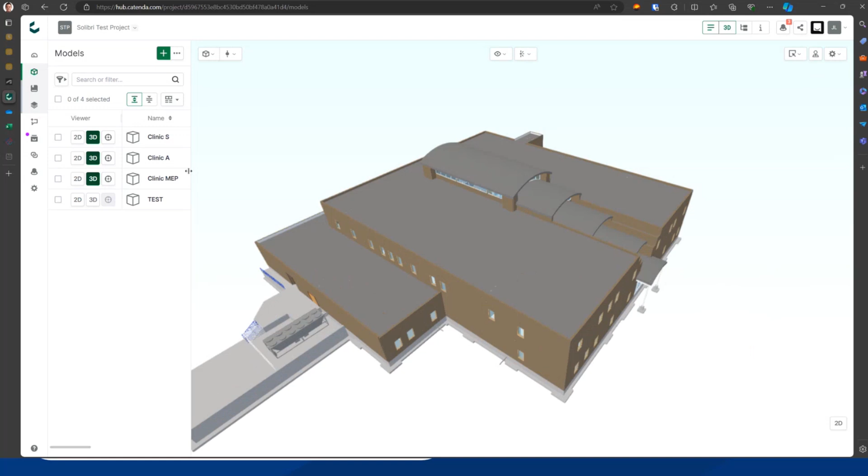But you get all the benefits of security. You have to have users that log in with passwords. They have whatever the security setup is, along with all the communications when something gets updated. You get emailed out and whatnot. I'm showing Catenda also to show the BCF Live connector, which I'll come to later in the demonstration.

But I'm going to actually house the model on ACC, so this might be familiar to you. And this is the basic structure of this project. I have IFCs, again, an open standard that we embrace. IFC is essentially you'll export your model from Revit or Vectorworks or ArchiCAD to an IFC file. It stands for Industry Foundation Classes, and it basically standardizes all the information and geometry into something that you can transfer, and you need to do this if you want to open it in some other vendor like ArchiCAD if you export out from Revit.

And then this SMC folder is where the project is I'm going to load. So I'll go ahead and do that. So you click Open Models, and then at the top here you can see I already have these connections to OneDrive, Catenda. I'm going to open it right from BIM 360, and if you recall the structure of that project, I have my project files, IFC, SMC, and this is where this model lives. It's nice. It gives you the version control. This is the first version of the model I saved. I'll click Open. And this is going to load the model.

And the background on this: again, this is a model that comes from buildingSMART. It's a multidisciplined medical office building of a clinic. It's the architectural, the MEP and the structural. And as these load, you'll see they'll pop up. And this is downloading it straight off the web from ACC. That's where you can see these versions here again.

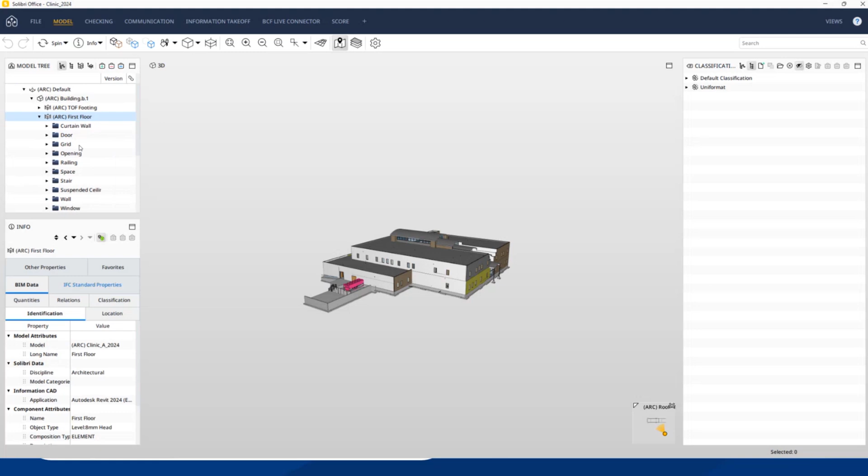And the nice thing about IFC is that it'll always have the same structure. As I expand these out, you can see it has the project, it has the site, and then it has the building. And underneath that building, you'll see floors. So I could turn on my first floor. I could turn on my doors. And then you can see all the doors on the first floor. And Solibri has a nice footprint control, so you can see where you are in the building.

And all of these components have their own properties. So I click on a door, you'll see that information from Revit. This is a Revit model, where you'll see the identity data property group. You'll see actual dimensions that come from Revit, along with some of the actual standardized properties that come over from IFC standards, which would be the Pset_DoorCommon. That's what they call this property set. So you can have the fire ratings and whatnot.

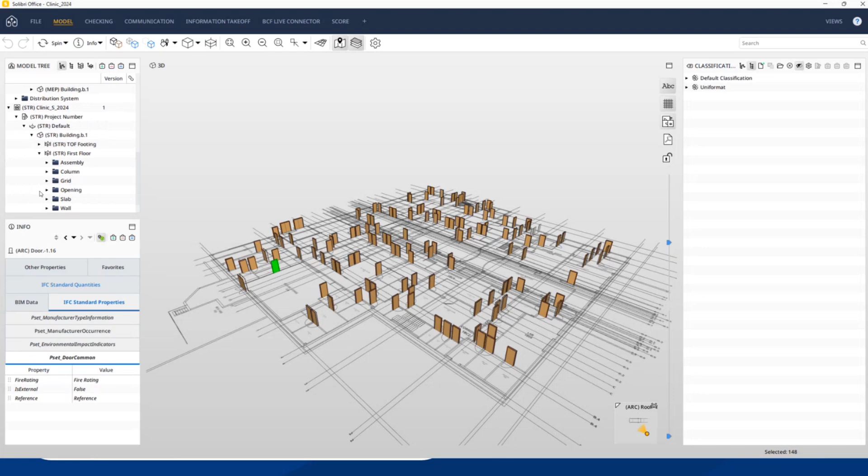And again, this is a benefit of IFC, is that it standardizes these so that you can open this in ArchiCAD and get the same information that you would have in Revit. And again, this is a multidiscipline model. So if I go into my first floor, I can turn on my columns and see where those are. And a nice thing is that it actually groups your systems as well. So I could turn on, for instance, my pipes and my pipe fittings here.

So here's the gist of it. You can navigate around, and the model layout essentially is where you'd query, do interrogation of your model, walkthroughs, and you can get a look and feel of where things are. Another nice thing, if I turn on walls, is that besides those dimensions and quantities that come from Revit, Solibri actually creates their own quantities based off of the geometry within the model. So I could use this information to see what the triangles, the mesh of this wall, would calculate as the area. It also calculates areas of openings or areas of windows.

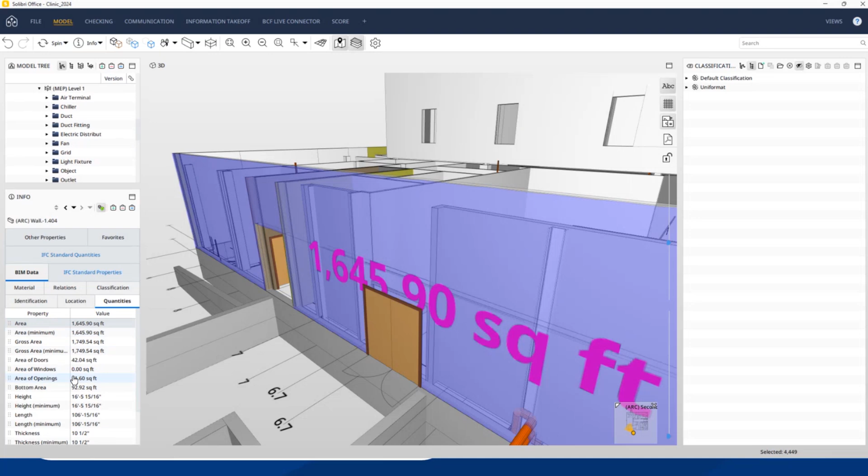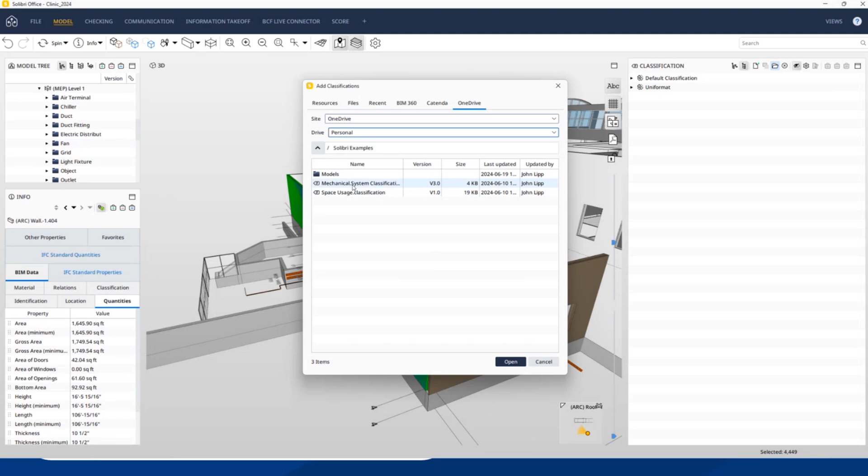And again, I'm using an integration into OneDrive. This is on my personal OneDrive of Solibri, but I could open it from a shared OneDrive. And if you have security concerns and you can't have these housed on one of these CDEs or anywhere on the cloud, Solibri is a desktop application, and all of these could be housed locally. Okay, so I'm going to load these two classification files. And as these load, you can see there's two different ones. There's actually some classifications that are brought along from the IFC. This is the Uniformat classification. And that's classification.

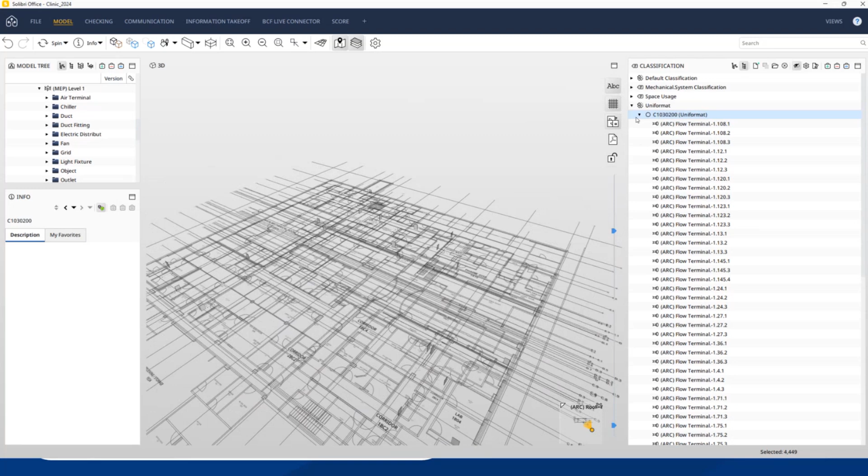You can see these look to be doors, I think. No, these are flow terminals, but they're coming from a bathroom. So they're classified based off of their Uniformat. Let's see if I got any other ones. All right, here's some light fixtures. I could click on a light fixture.

And what's nice is these actually get mapped straight from Revit from the assembly code that you might be familiar with under identity data. So that's where it's mapping these. And you can set these up if you want to go to that length. If you embrace IFC, you can actually use the IFC export setups and create your mappings and, I guess that would be called property manager, with your shared parameters to create these classifications yourself. But if you don't do that, Solibri has its own classification mechanism.

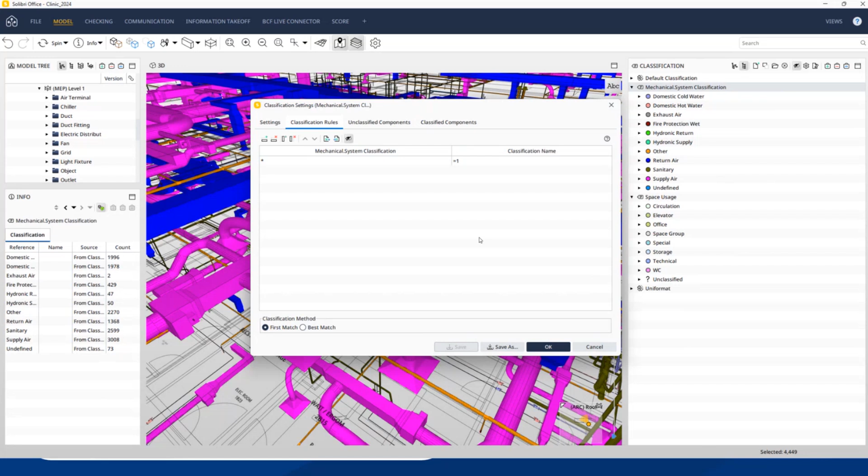So for instance, if I look at this mechanical systems classification and I open its settings, what it's doing is it's taking this property group from your mechanical systems, your ducts, your pipes, or what have you. And it's using the system classification property, and it's just using this =1 to grab that property value to classify those components. And then in settings, whatever that value is, you can color map to whatever you want. I've kept it kind of the same as Revit. I know the supply and return are pink and blue.

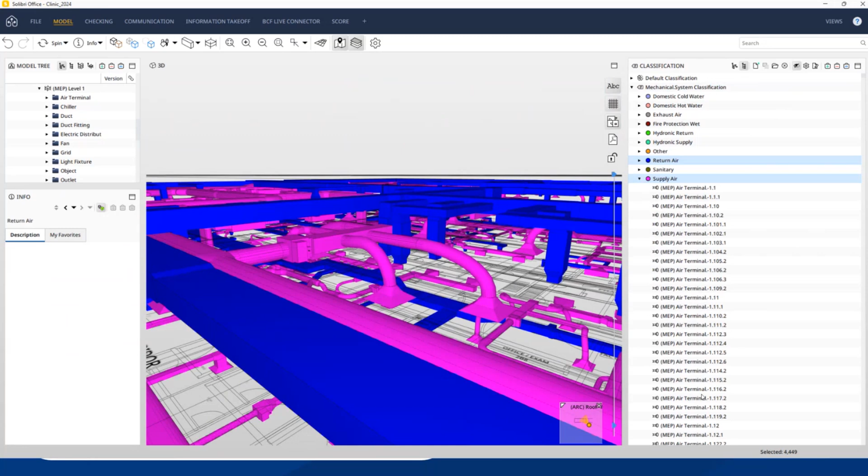So what you can do is then click on one of these classifications, and it then isolates those in the model so you can see where are my return air ducts and my supply air ducts. And you can expand them out and see those individual air terminals and ducts and whatnot. And so classification, again, makes things consistent.

If you want to use mapping, say the values don't map to a specific classification you need, namely function of space, you can actually use the classification rules of the values to then map to a specific classification. So for instance, my corridors would map to a circulation space, right? Or CORR. would be a circulation space, same as a hallway.

And you can color code. So say, for instance, my office is here, kind of this drab green, doesn't really stand out. I could change this to be whatever I want, make it a nice red color. And now my offices are this color, and I can see where they are in my project. These would be rooms, but we call them spaces in IFC.

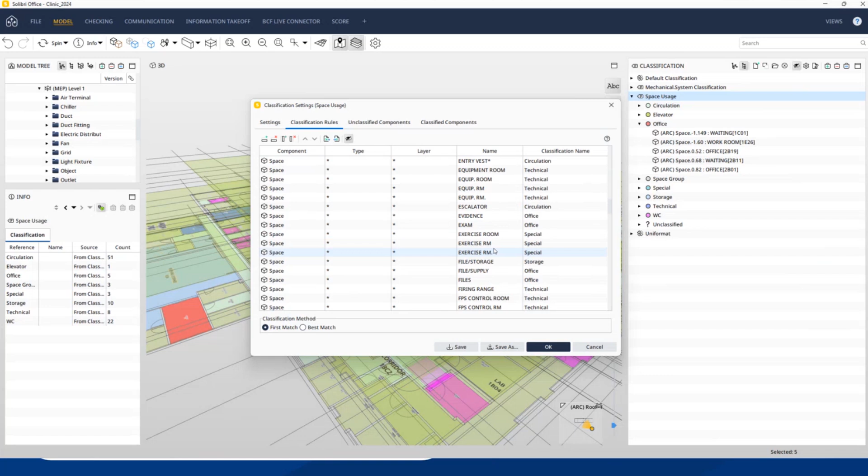But are those the 5 offices? What you can do is use some of these wildcard characters. You could adhere to a very strict naming policy, and you can actually check, which I'll show you with one of our rules, that those are an agreed naming list. But you can also use these wildcard asterisks. This means that any character or no characters can come before office or after office, and that classifies it as an office. So you can see I have 5 of them here now.

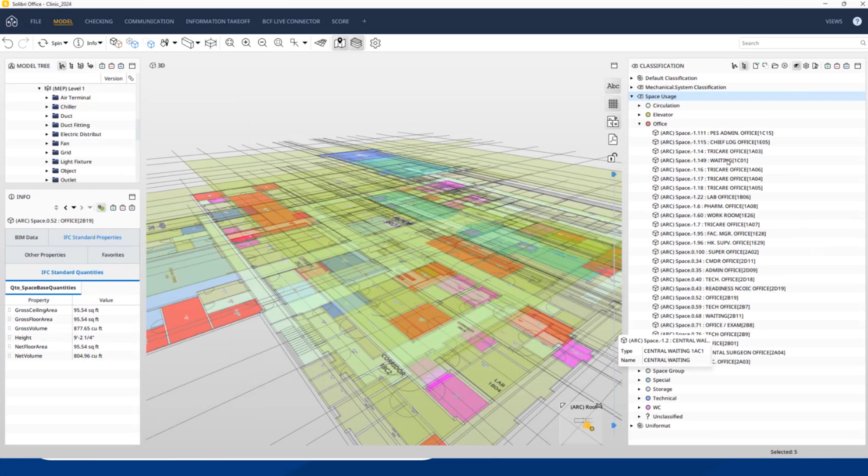After I click OK, boom, I get all these other office data. So now I'll have a more complete look at what my offices are. And you need to do this if you want to create a space program. Across your entire building lifecycle, early on, you can create and check your space programs in your schematic design and design development phases, right? And that's classification in a nutshell. I'll keep moving on to the next topic here.

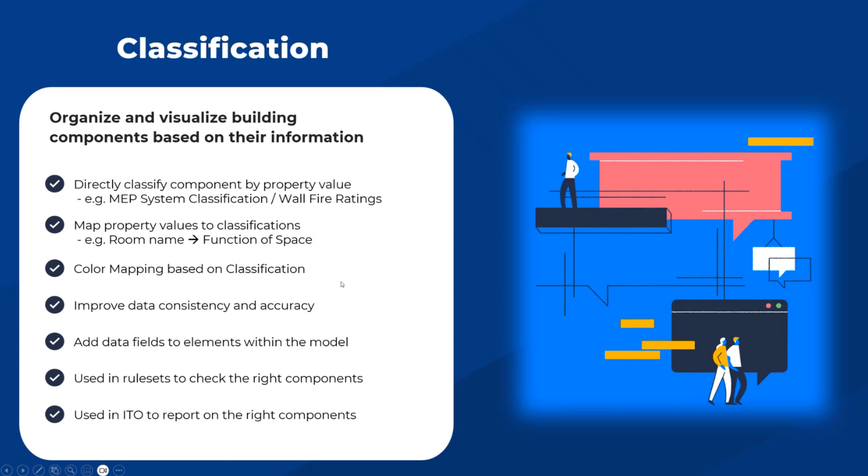Which then brings us to rules-based checking. You've classified your components, now you want to check them. And you want to check early. The earlier you find your issues, the cheaper they are to fix. If you can catch them in the design phase before things are being built, it's cheaper than in the construction phase when you're running your coordination checks and clashing, where you have to deal with the cost of rework and materials. All the way to checking against requirements such as ADA, where if those problems made it into the building, you could deal with actual lawsuits, because those are government mandated requirements, like your 18 inches past the latch and wheelchair turning circles.

And on top of that, you can align with other disciplines, the basics of clashing and coordination, along with different requirements, be that COBie, Construction Operations Building Information Exchange, or whatever requirements you'd have, either in-house through your company or mandated ones through government agencies. And I'm going to show you 5 different example rules, and these are the ones that our users use the most, or that showcase some of the valuable tools you can use in Solibri.

And that would be the clash detection matrix, which is a new rule that came out in the latest version 24.5 of Solibri. Next, I'll show you free area in front. The beauty of this rule is that you won't have to model your clearances in front of, say, your doors or electrical panels—those boxes you might model with geometry to then run a clash on. Instead, Solibri has a rule where it'll actually define that for you.

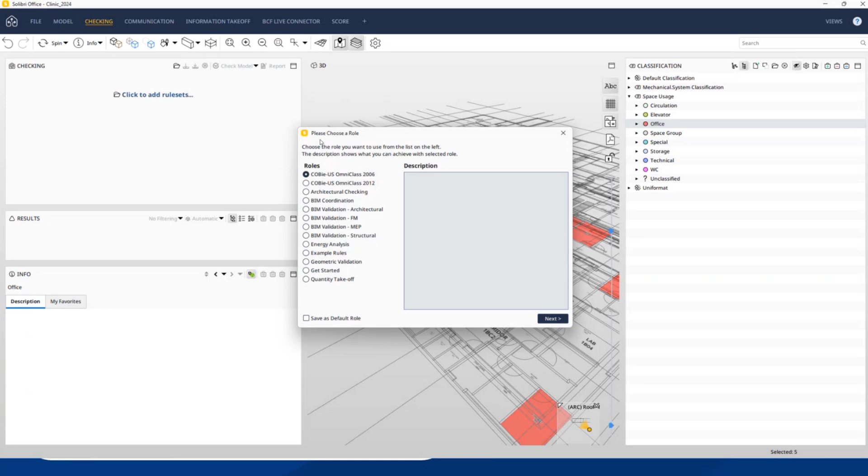And what you might have noticed is it opens this little wizard-like dialogue that asks you to select a role. And what a role is essentially, is what is your job? What is your use case? How can Solibri help you achieve that goal?

Be it whether it's BIM validation, where you're going to check QA, QC rule sets—basically validating the information there, do you have some weird types of columns not supporting things? Or are you running coordination, where you're doing clash checking between your different disciplines? Or maybe you're doing energy analysis and need to make sure you're pre-checking that all the properties are there for your energy analysis or carbon data or what have you.

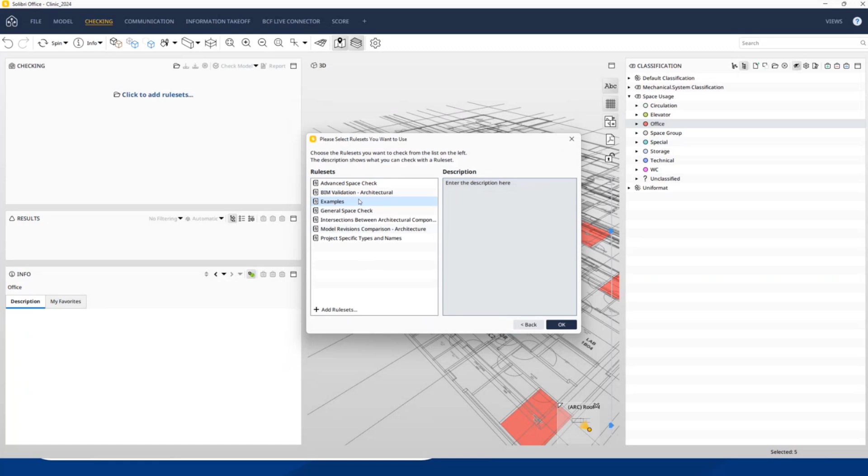As those load here, you can see this is what a normal rule set has—this nice little kind of hierarchical structure where I have my clearance checks under BIM validation. So if I expand these out, you can see basically how a rule is set up. This is the clearance in front of windows, right?

You select what the component is you want to check, and you can change this if you don't want to check windows. If you want to check for doors, you can see as I switch between these, there are two different filters—this is checking for windows with one set of depth requirements, as opposed to checking for doors with another set. If I click something else, clearance in front of ceilings, it's a whole new rule template.

And these templates you can kind of think of as recipes that you have to fill in the ingredients, which would be the parameters of what you're wanting to check, right? And I'm just going to show you these three.

What I'm going to do is open up my rule sets for editing. These are my example rules—you can see there's three of them here. I'll open it up for editing, and I'm going to drop in that new clash detection rule, and set it to my first example here.

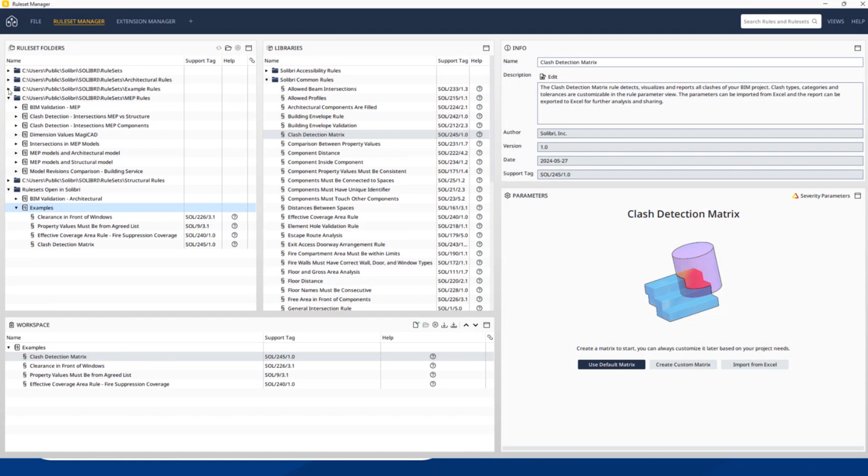And these are where the libraries are—they come out of the box with different rules set up for disciplines. You can check your MEP, basically like a check for maybe your exhaust intake being too close to your intake for your supply air. We also have each individual rule template coming with an example rule that shows you how you can set it up to run a certain type of check for you.

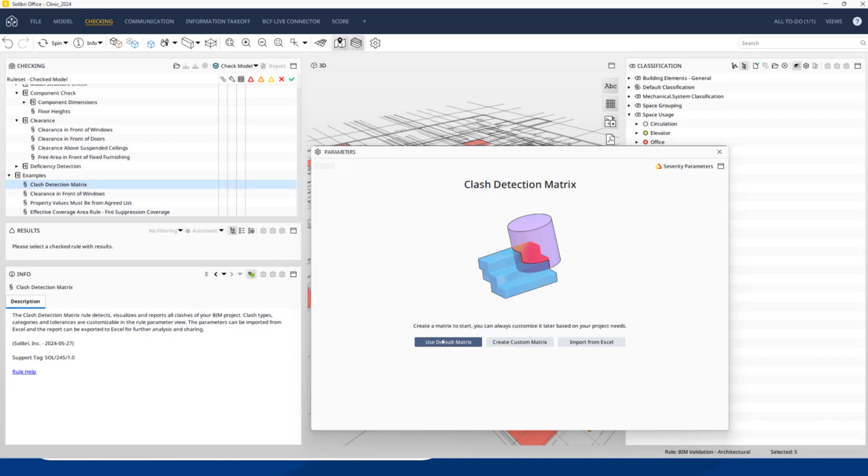What I'll do is jump back into Solibri and run this check on these examples. You can actually modify this rule on the fly that I just added to my list. I'm going to modify the parameters of the rule, and again, you can use the default settings or I can create a custom matrix.

If you're not familiar with what a clash matrix is, you basically set up your rows and columns, and where those rows and columns meet is where a clash category would exist. If you're not familiar with IFC, like IFC spaces, instead you want to use rooms or structural framing instead of IFC beams, you can change these.

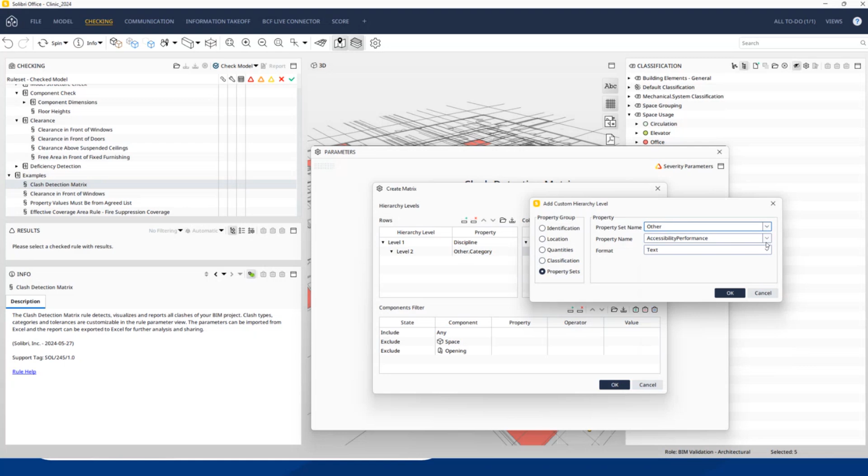What I'm going to do is load a different category here. These live on my OneDrive, and I'll open up my discipline categories. These are the locations, and you can click any location - I can show you how I set it. You just go to your property sets, which live under my property group 'Other' in Revit, under category. This is where you'll find those familiar categories.

Once I click OK, it's going to set up this matrix for me based off of what is in my model. If you have an early model and you're going to add more items that aren't present there, that's where you'd probably want to import an Excel sheet. But for the sake of how easy it is to set these up, this is the way to go for a demonstration.

Here, each cell you can see - if I wanted to focus on, say, ducts versus pipe fittings, and say those are a higher severity or more important to me, I can change the tolerances and change whether or not I want to check different types.

Maybe I want to check for duplicate mechanical equipment, or duplicate doors or light fixtures would be a good one. You can change the different types of clashes, and I can change the different severities.

So I'm going to say my pipes versus ducts are important to me. I'll say maybe my clashes that are internal to my structural model aren't so important, so I'll click multi-select and click low. Now I'll just run a check.

As it runs, you can see these progress bars go by. What's nice is I can actually start clicking and looking at issues. Normally the workflow would be you click an issue and you can see these different categories of different problems here, and each rule will have a different way of categorizing.

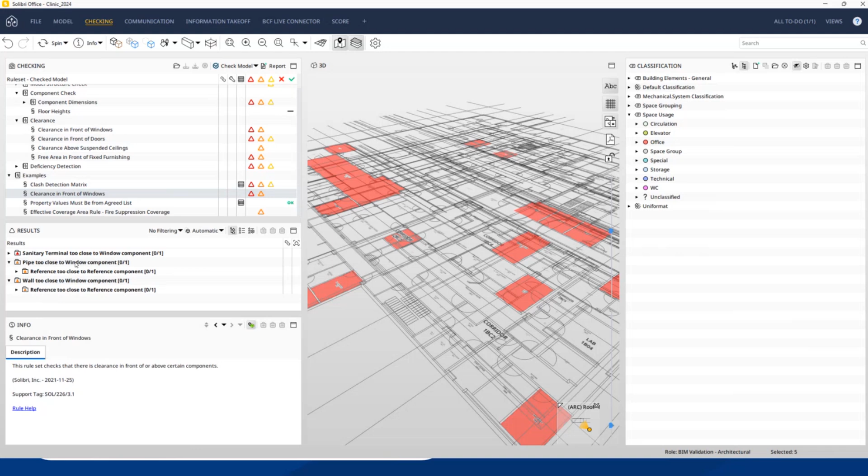I've jumped to this window just because Clash was still running. It's now done, and it'll basically show you the difference between these categories. Now it's showing me my pipes too close to window - you dig down and it'll tell me the type of pipe, and then it'll actually show me the issue with my pipe. This is the one I'm going to come back to later.

Let's jump right back to the matrix, and you'll see how it's organized these. It's done a great job of sorting by what's important to me - again, I said pipe fittings versus ducts is what's most important and critical.

What you can do is turn on and off these severities from the checking and focus on just your severe issues. As you turn these on and off, the rules that don't have those issues disappear, along with the actual listings of results. So if I turn off my high severity issues, which I accidentally did, and turn off my medium, you'll see it'll just drop out to only those high severity issues.

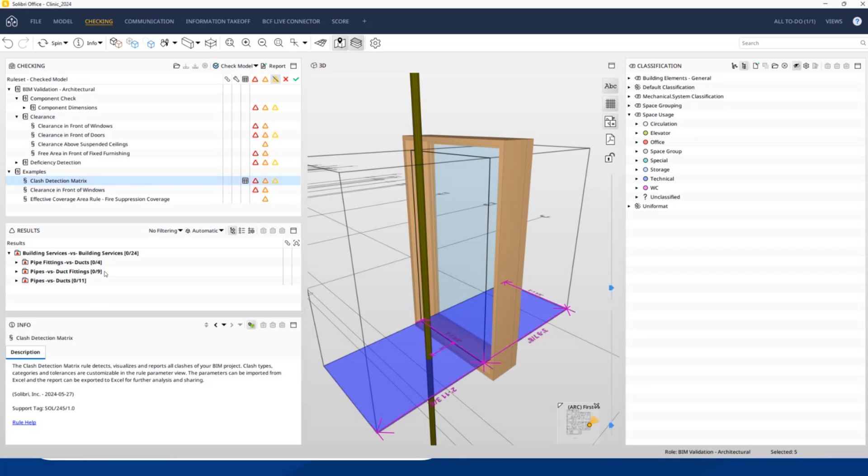I'll turn everything back on here. You can either work from here, but there's a beautiful tool that comes with this clash detection matrix - it's a report, and you'll see it has the same setup as in the parameters, but it's actually listing the counts of all these different clashes.

So I have ducts versus pipes, 11 clashes of ducts versus pipe. What I can do is click on this and double click on it, and it'll zoom me out to the location of where all these different clashes are. So here I can see it actually corresponds to these.

What I can do is right click on this cell, say select results, and then it jumps into my results view and takes me to that location of this category of ducts versus pipe.

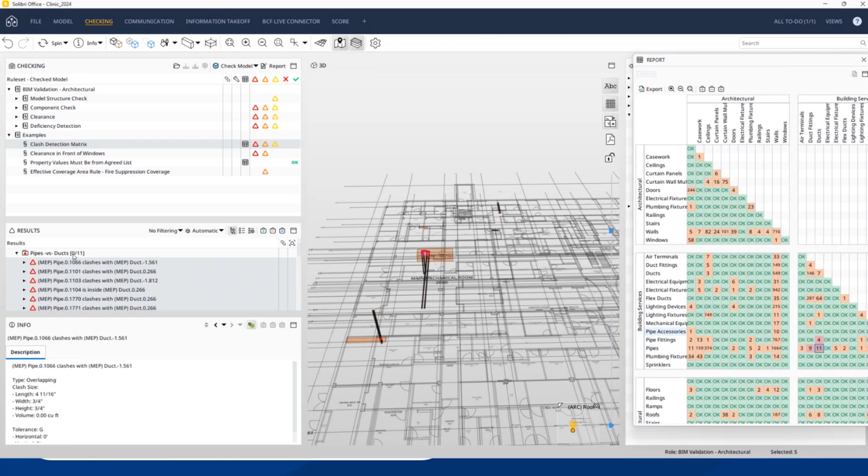And you see these numbers correspond. I got 11 ducts, but do I really have 11 clashes? If you look at this, it says there's 2 clashes here, but really these pipes probably correspond to one another, and you probably just need to move them somewhere, and it's probably just one clash.

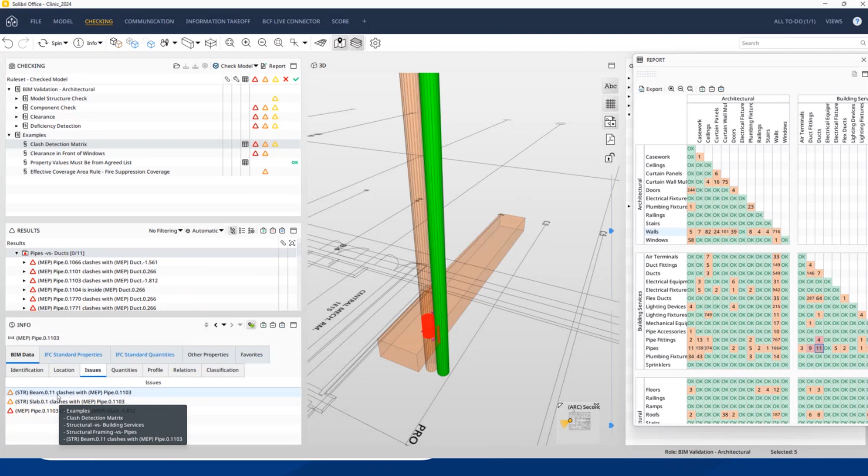But is it one clash? You can either work from this window here, or you can start looking at the individual issues by selecting on a component such as this pipe. And what you can see is if I go back into this pipe and click issues, it says I have 3 clashes here, right? I also have a clash with a beam, and I can double click on this.

It shows me, okay, I've got a clash with a beam. It's not only I have to move this pipe out from the duct, I actually have to move it from the beam as well. If I double click on it, again, it'll take me to that clash in the results view. So there's a whole different workflow, ways you can actually get a basis of what's going on in your model.

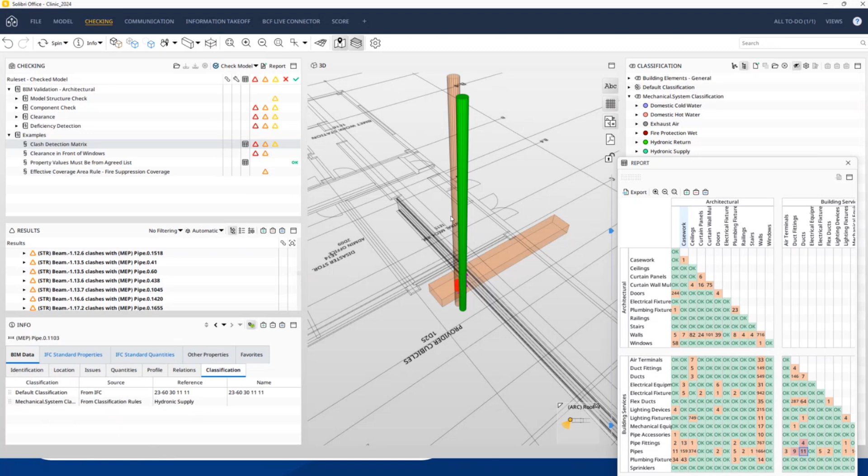Again, I can actually use my system classification. Look at what the system is here. It's a hydronic supply and a hydronic return. I probably would want to turn on those 2 systems and then look at the issues again. Double click on it, turn on the issues, and now I get a better feel for where are these systems headed.

Actually, that's over here where the clash was. It also gives you a great visual, making it transparent. The components that are clashing are highlighted as red, is where the actual clash is. It also gives me this little dimension line, and sometimes this comes in handy. Like for instance, I could move this pipe out specifically 5 inches and it would no longer clash. But you want to get a feel for what's going on.

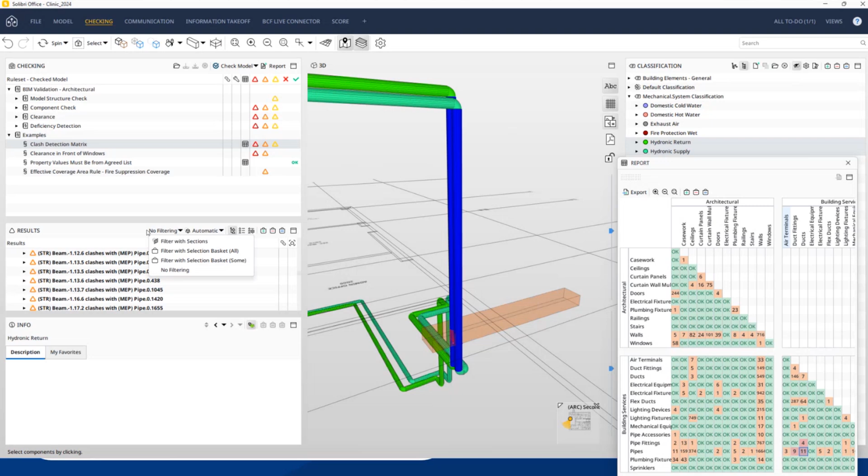And again, I could actually even multi-select on these and then use these selections to then filter all my results by them, right? And now only the clashes that these pipes have are now listed in my results. And what I can do now is focus on the basics of clashing and coordination, these and this duct and this beam that's running across.

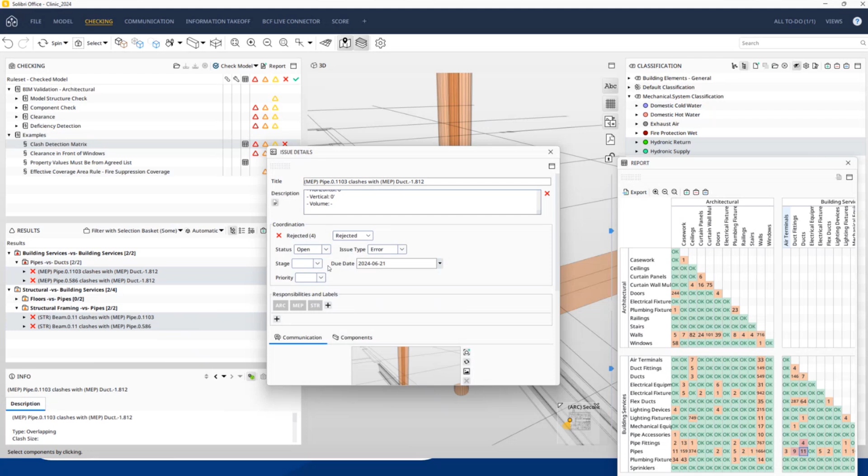And from here, I'm going to create an issue. I'm going to create an issue slide. I'm not going to go in too much depth because I'm going to cover that task when I'm going through the BCF or communication. But this is where you'll essentially set, for instance, a date. Maybe I want to have it done by the end of the week, and set whatever information you want.

I'll just say move. I've got caps lock on. Move the pipe out from the duct and framing. And I can actually add multiple slides, right? I could turn back on my hydronic supply, and I could turn on my beams, and I could zoom in a little bit more.

And now that I have this set, I want to set this to no visualization and say I want to add a slide here. And the beauty is now I can actually jump between these two visuals, and it'll come in handy when I'm using my CDE to show these issues. So again, you can get multiple viewpoints and multiple slides. And I'll just move on to the other checks. So that kind of sums up what you have for the clash matrix.

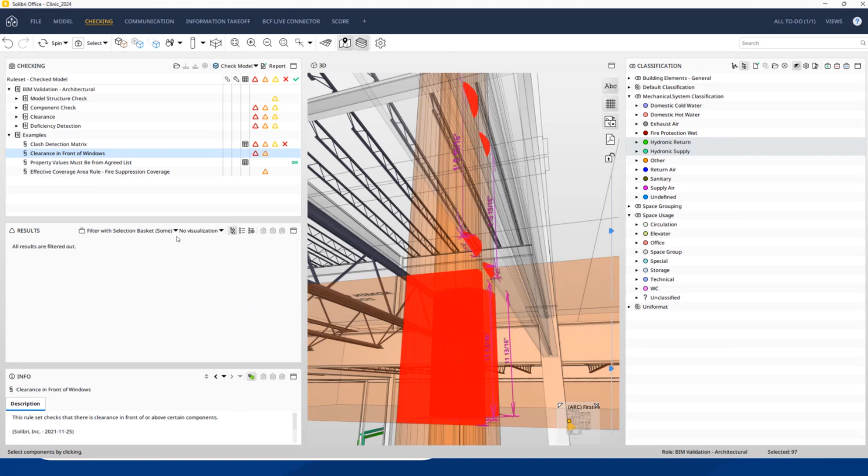Clearance checks. If it says all results are filtered out, that probably just means I have my filtering on. I want to set my visualizations back. So again, I'll come back to this soft check.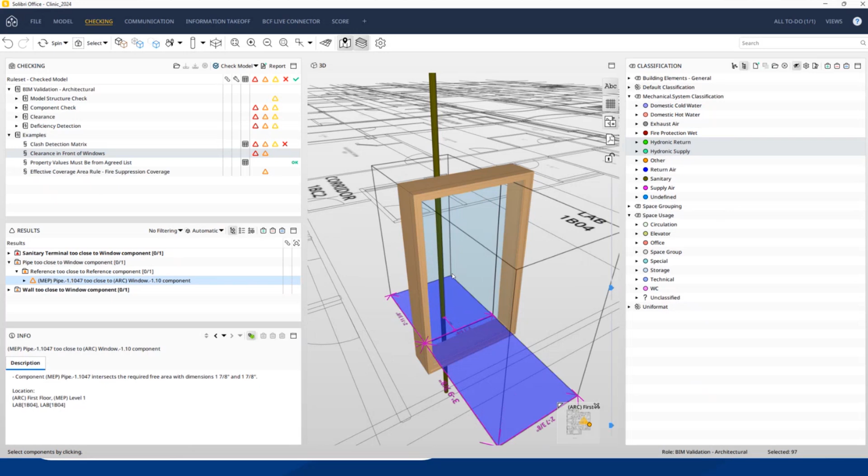And normally, if you're not using this tool, you'd probably model a clearance geometry in front of this and just run a normal clash. But what this is doing, again, it's finding and has a different visualization and gives you more information about what's the free area that you set up. It has to be 1 and 7/8 in front, and you have a pipe running into it. It's actually on this side.

So again, I'll create a slide for this. I'll just say move the pipe in the wall. And it also gives you the location, right? It says my first floor, and it tells you it's my lab. And if I look here, sure enough, it's in my lab 1804 on my first floor. So it gives you some information of where that issue's occurring.

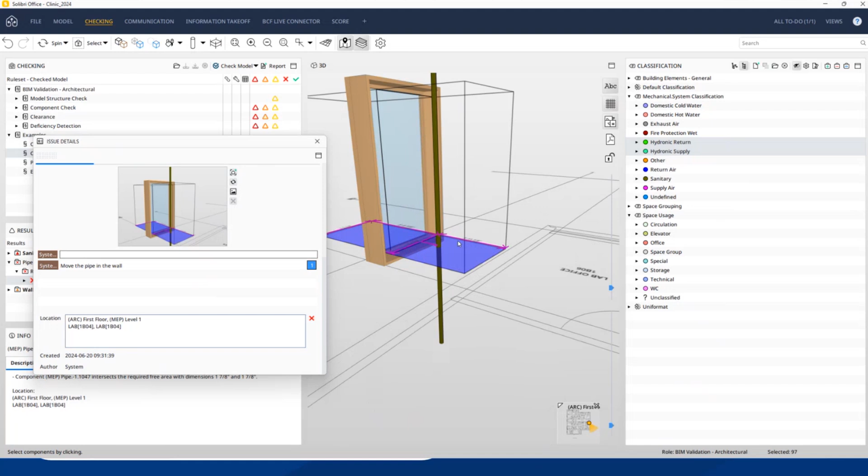And again, if I wanted to, I can turn everything on. And this will probably be useful for when I'm looking at it in another application. And I can set some, what I'll do is I'll set some markups. And we have markup tools. You can do a cloud.

I guess maybe I could draw it right here. And it superimposes whatever you're drawing on whatever the surface is, which is very handy instead of just having it float in space. And I'll just say it has to move up and kind of follow this location here. And then I'll just add another slide, right? Here we go. So now again, I can zoom between these two different slides there.

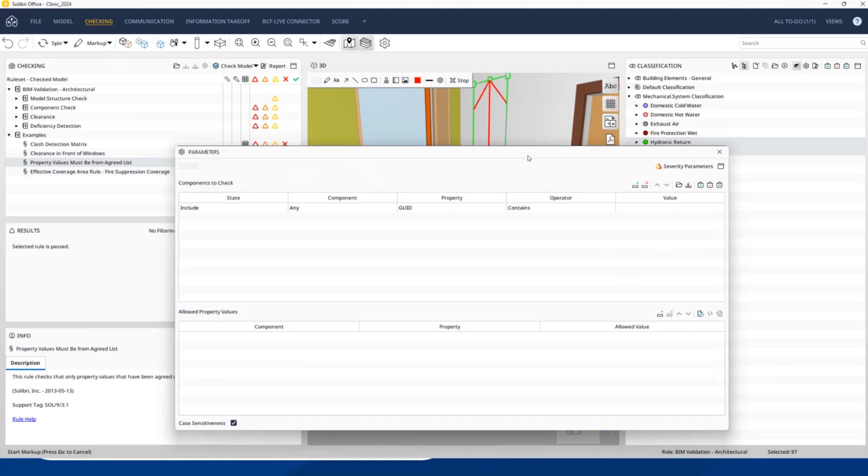Right? And then moving on, this is where you'll be checking, say, for instance, your level of information types of checks of your properties, right? You look at these parameters. I'm going to check anything in the model. And what I want to do is say, all right, I want to check that all my air vents or all my air terminals are from the right libraries that I'm using. I don't want to use any generic components or generic types, right?

So I select air terminals, and I can set this manually, right, by going through these and then looking at my listings here. But what I can also do, and what a lot of these rules have, is the ability to import Excel sheets, right? So rather than doing that, I'm going to click this button, and again, this lives on OneDrive. And what I noticed today when I was going through, I keep modifying this so many times. It actually gives you that version control. This is the 8th version where I've modified this air terminal.

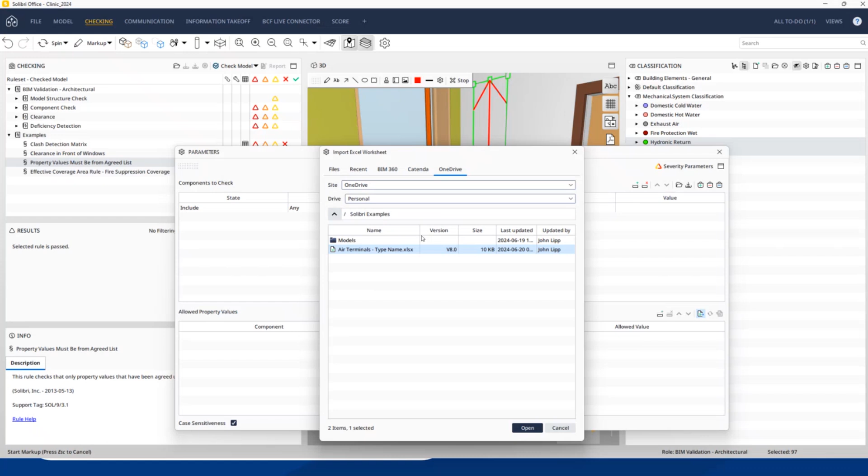If you actually want to look online, it lives right here. So what I could do is I could live doing this. I could erase these two, and then it would update the information in Solibri. What I'll do is I'll just open it, and you can see how it imports, right? So I do have these two air terminal types, right? I don't want to include those. What it'll do is basically just, I'm cheating. I'm going to show some issues. It's hard to show issues with the model if there aren't issues. So I'm going to say that these aren't allowed values. I don't want 200 millimeters. And I don't want standard. It sounds too generic to me.

But I'm also going to include some checks, and you can mix and match whatever components. You'd probably want to separate this out from your air terminals. But I'm going to include this just so you can get a feel for not only different type libraries you can check, but also standardizing what you would use for values for your fire ratings. 1 hour, 2 hour, you could be using minutes. You could say NA, or you could maybe not want to say it's not applicable and say you have to have something there. But I'm going to select all these and click finish, and boom, it loaded it up here, and it's actually synced. And whenever you want to update this, you can have somebody not using Solibri update that file that's on OneDrive. So now I'll click check model.

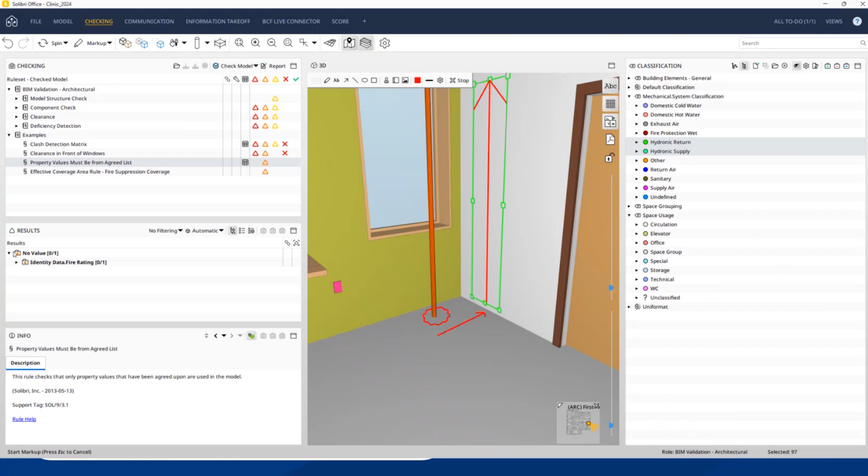And you'll see, I wonder why it's not showing me my, oh, do I have filtering on? What do I have wrong? It's not showing me my issue with my, oh, did I include those? Oh, that's why. It's hard to show issues if there's no issues. Everything's fine with my air terminals. I accidentally selected them. If I didn't want to have these, I would delete them out. Sorry. So now those aren't allowed values. I'll rerun the check, and now you'll see it saying the air terminal.

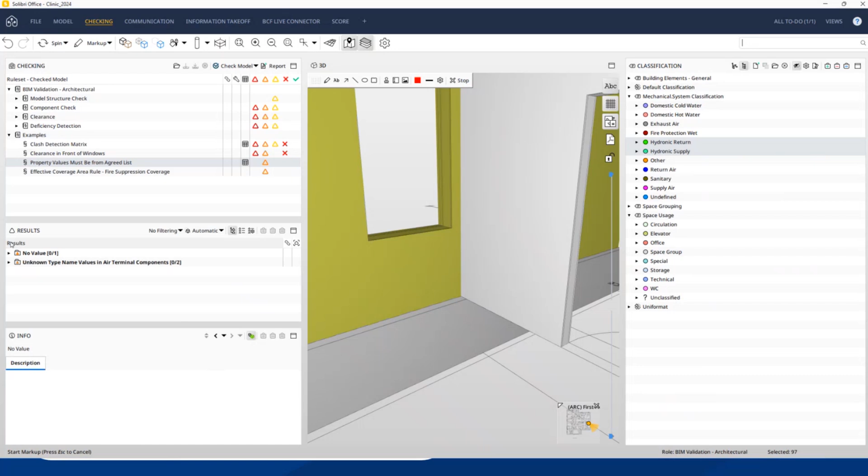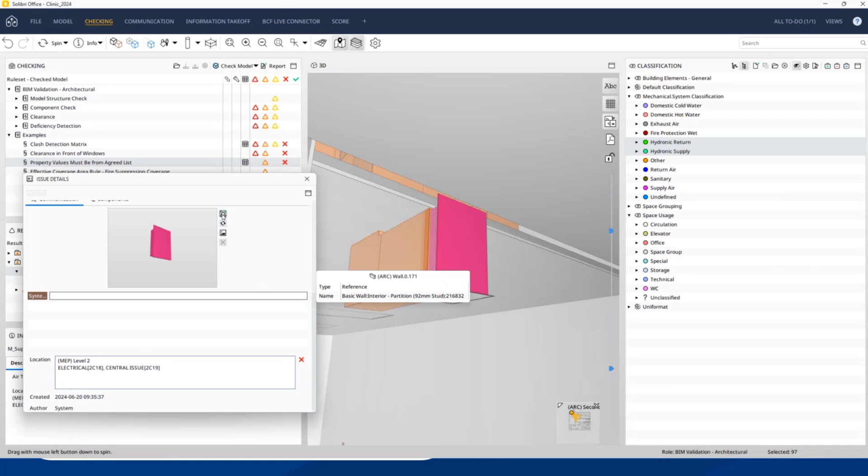Okay, live demo, my first issue here. And then you can see where the problems are. Here's my air terminal. There's only one of them in the model. Maybe that would be an issue. Maybe I shouldn't be using this air terminal. I don't know. I'm going to add a slide here, and again, I'll turn everything on, and I'll maybe make this transparent, and then add another slide. Say odd terminal, air terminal. And then let's see. The other issues, no values.

These are walls that don't have a fire rating. If I click on one, I can verify that by going into my BIM data, or actually my IFC standard data would be under wall common, and there should be a fire rating listed, or else it would be mapped from identity data fire rating. And what we have is another view called the check components view. And this essentially is the anti-skeptic view, where you can actually see what's been checked. You've checked 1,560 air terminals and walls for those values, right? And if I click on a wall that passes, you can actually see it does have a 2 hour rating. That's why it passes, right?

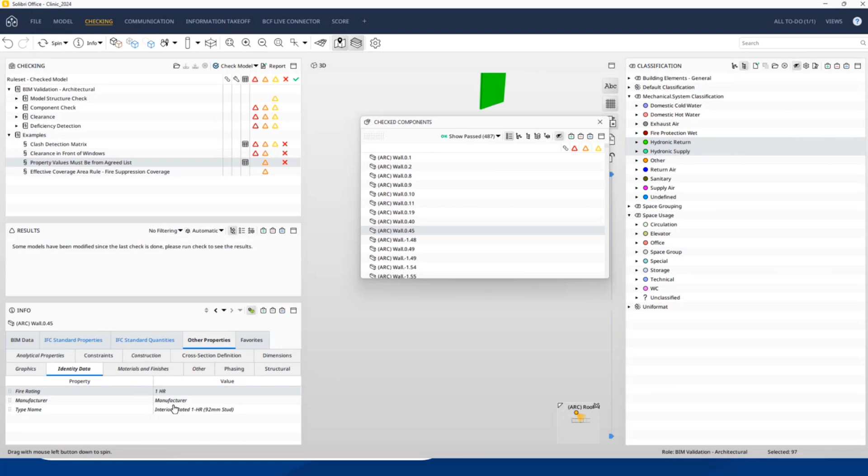Another beauty I should mention about this and classification is I could actually right-click and create a classification on the fly for all of my walls. And you can see it's actually color-coded in my model, all the 1 hour and 2 hour. So again, validating information in LOI. If I wanted to, I can create a check for that. I would just have to rerun my check with that new classification.

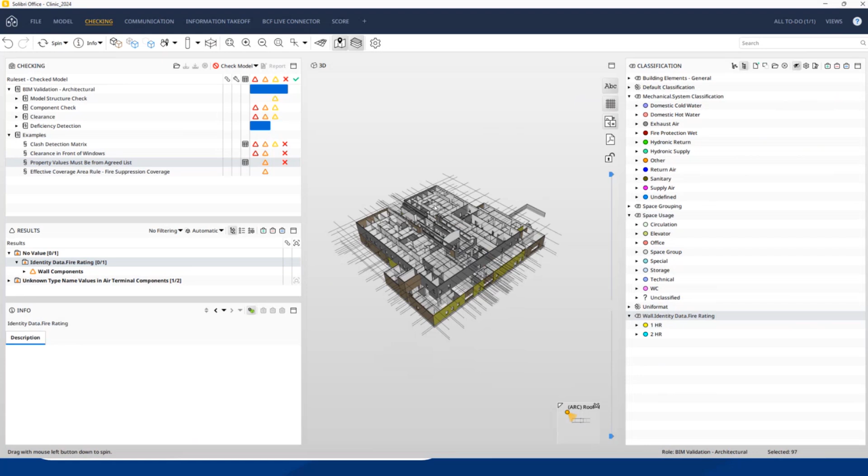And let me just create a quick slide for all of my walls that don't have fire ratings. And then I'll just do a zoom out and kind of get a look for that. All right.

Effective coverage. Let's see. Effective coverage. I'll touch on this quickly. Again, this is a different coordination check. It has a flat listing. You can actually show all of these as a flat listing of issues, but you can actually categorize this however you want. I'm going to load a custom hierarchy. Again, this lives on my OneDrive. So I'll open it here.

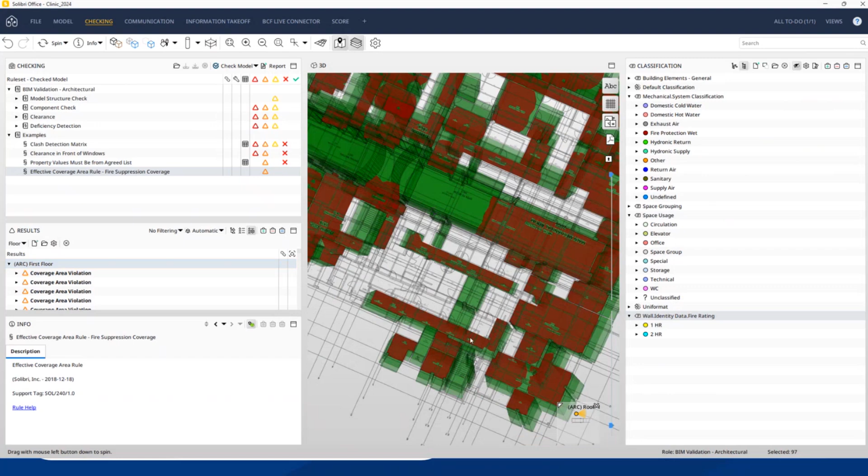It's called federated floor. It takes whatever the architectural model's floors are and then groups by that. And what this is, it's essentially showing me all of my coverage for, sorry, fire suppression terminals, sprinklers. So if I come over to this area here, you can see it's showing me in red, and they're kind of small and hard to see.

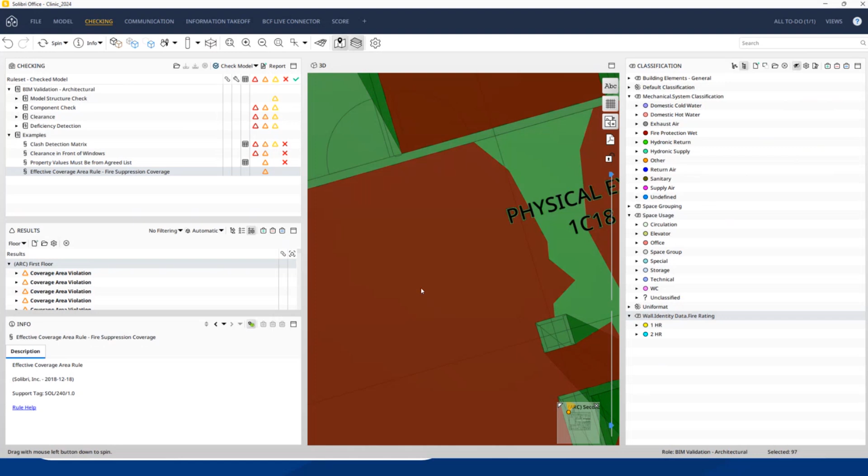But basically, it sprays 10 feet in every direction, a circle, I guess. And where there'd be a column, logically, the water wouldn't reach and wouldn't spray there. You can look, and you can see how this is set up. And you can tailor these to different settings. If you wanted to do distance of travel, you could set this, for instance, the distance for a fire extinguisher, how far you have to walk, or for ventilation. This is actually what the rule was based for.

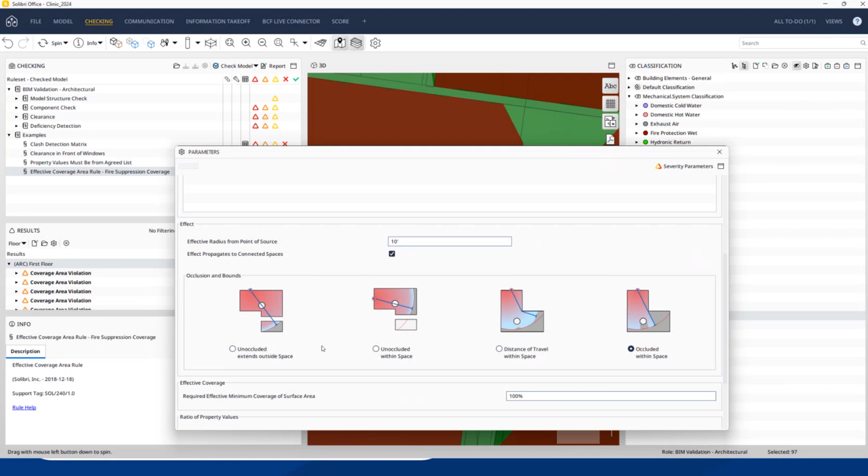And the idea is that Solibri isn't really a one-trick pony. You can set these up. It's not a black box. You can actually go under the hood of the software and change these. For instance, if you didn't want to do occluded, you could say for Wi-Fi, going through walls and whatnot, okay?

And with that, I'm going to jump right into model comparison using a different model. Again, you can see the different locations here. This, again, is a nice thing about the File tab and Recents. These models live on OneDrive. This is a model that just lives on my desktop called Version Comparison. And I'll go ahead and load this.

And the easiest way to understand what's changed in this model is to actually just look before running the check, and I'll show you what's changed. So I have two versions of the same building. It's a real simple Solibri building, I guess one of the sample models. And if I click between these and turn them on and off, you can see the top room here. Its length is increased over here, the area of it.

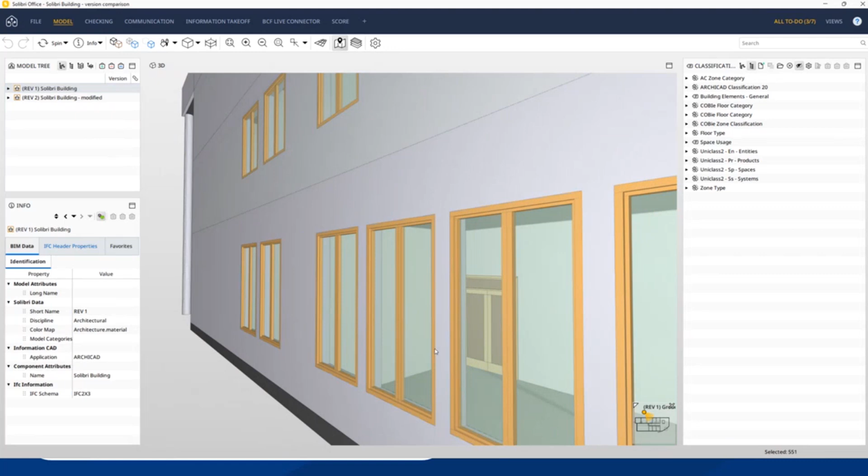And what they've done is the original model had a single conference room. And what they did, interestingly enough, what you'll see in the results here is they moved the wall over here and then knocked out this window. I thought they just drew a wall here, but what you can do is you click the checking view, and under component comparison, it has a nice listing of what's been added and what's been removed.

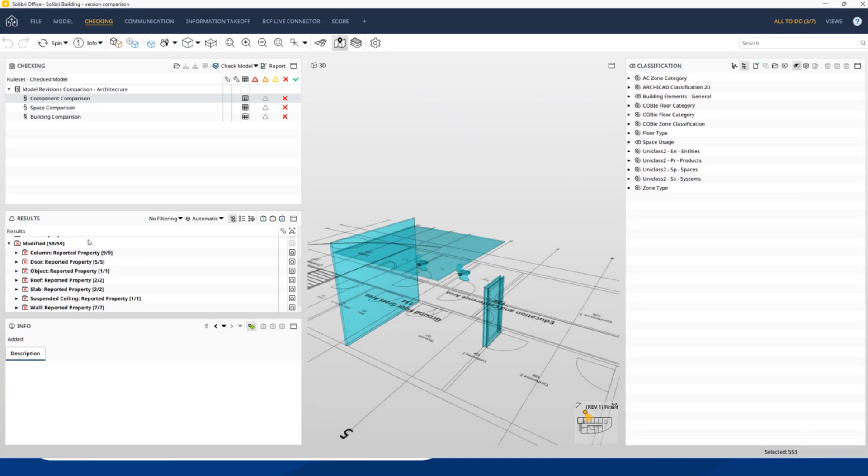And so what I didn't understand is, okay, the wall is now dividing this conference room. Why is the new wall added here? And then you would actually look at what's been modified, the locations, the properties. And what they did was they moved the wall to bisect this conference room, added a suspended ceiling here, created a new door for the wall that they moved, and then dropped a new wall where the other wall was. So that explains that.

Why are these toilets added and removed at the same time? What they did was, I don't know if it was an accident, they deleted instead of changing the type. And when you delete something, it makes a new entity handle, or I guess it would be a model element ID. But you can change these to whatever properties you want, right?

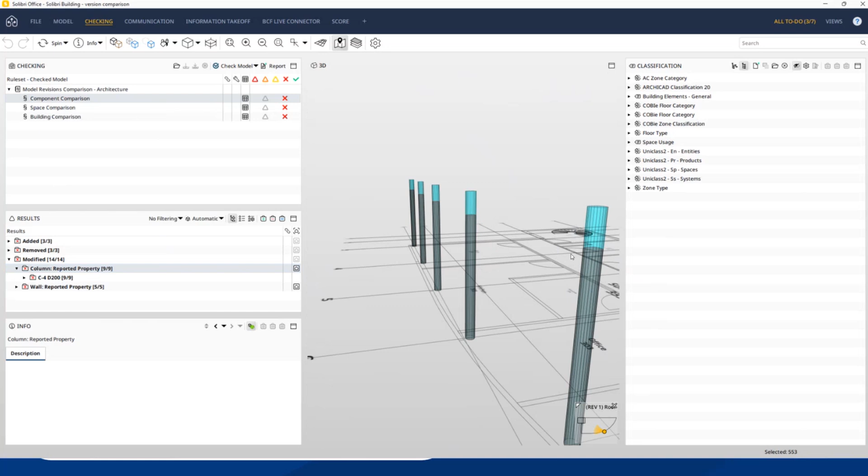You can modify these, and if you wanted to focus on just lengths, I could change the properties that I want to check to just be my lengths. Oops. Let's click all these. You can multi-select, but I'll just do this. And say I just want to focus on quantities, and these are lengths that are calculated in Solibri. Another interesting thing about this model, if you rerun the check and you look at what's modified in terms of lengths, the columns, and this is actually caught with one of our rules, whether or not the surface is touching.

What happened was in the original model, these columns aren't actually reaching the top of the roof, so they're not really supporting it. And you can actually check for that with one of our rules. But in this one, they moved them up, and that's why the length has changed. And now you can actually verify that with this length, showing that the length of these columns has changed from 8 feet to 10 feet.

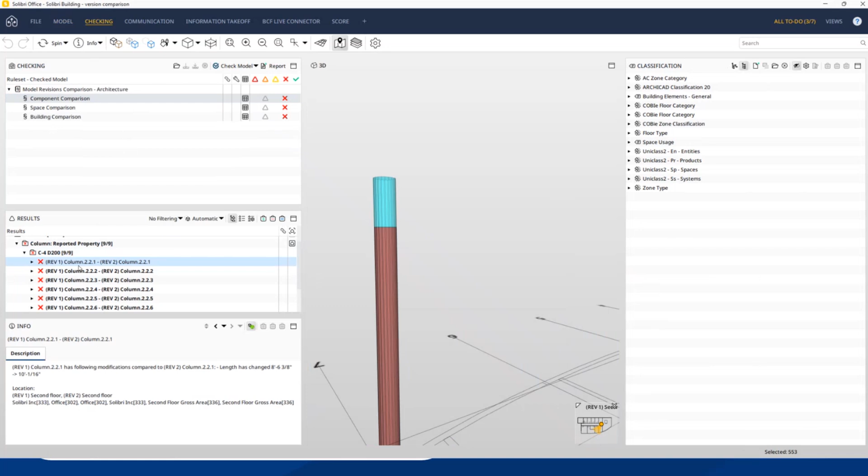So you'll get all that reported, and you can actually use this report to show the deltas of what's been added, what are the different lengths, and whatnot. So very useful, because you'll be telling somebody, all right, I need something changed, and they'll do the job of changing it. But you also want to know what are the ramifications of them changing that. What else has been modified in the model when they made that adjustment, right?

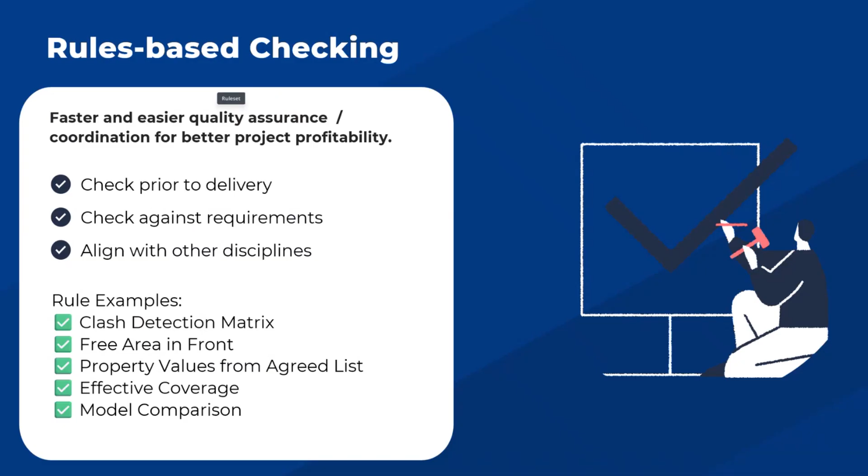So now, jumping back into our presentation, I've got some issues, and I want to communicate them. And how am I going to do that? Well, the most seamless and collaborative way is through BCF. Again, BCF is another open standard from buildingSMART. It stands for BIM Collaboration Format, building information model collaboration format. And you don't really need to know about BCF. The whole point of it is to transfer information, but it essentially stores an issue report along with where the camera is positioned and what it's focusing on, what components are supposed to be isolated in the view.

And Solibri is 25-year-old software, and we've been doing our reports long before the cloud and BCF have been around. So there's plenty of different Excel report templates you can use. You can create your own. And again, if you have security concerns and don't want to hold your issues up on the cloud, you can send them off either by email or in your own secure shared folders, these customizable reports, which can be PDFs, Excels, or what have you.

Or you can save it off to our native format, the SMC, which will store all the issue information along with the 3D geometry and highly compresses it down to like 80% of your original model. And again, it'll track all the information that's important to you: who's supposed to fix it, what are the dates, what are the priorities, and all the comments, with who authored each comment and what date it was set. And for that, I'll just jump right back into Solibri. I've created some of those issues.

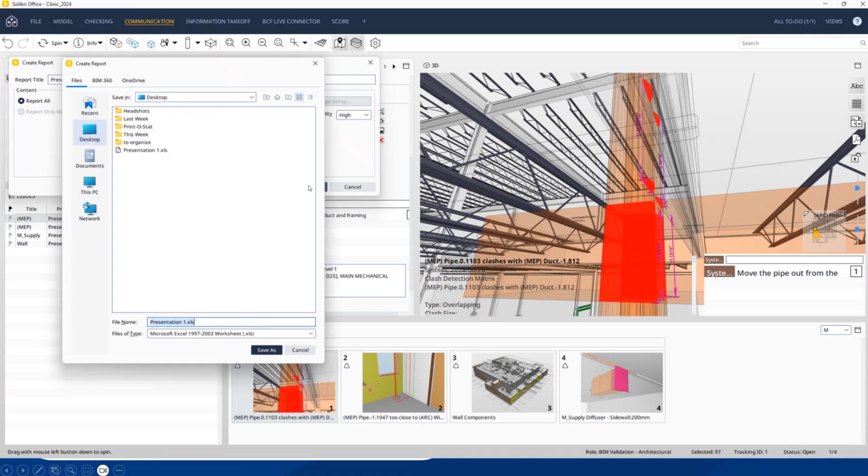And from here, I can create a coordination report, for instance. Let's see, coordination report template. I'll just save a report. You can actually modify this to your own templates with whatever information you want, but I'll just click save report and save it on my desktop. And what this is, essentially, is each row is an issue. You have a nice little snapshot. And this is the old way of doing it.

What I want to focus on is the BCF Live connector. And again, what I'm going to do is connect up into Catenda. So I'm going to click on this, and you can see all the different connections we have. Again, we have CDE connections, which are where you're going to house your IFCs. This is where you're going to house your issues. And you can see a whole long listing. And again, this uses the open standard BCF APIs in order for Solibri to easily connect up into those. So we have a big long listing.

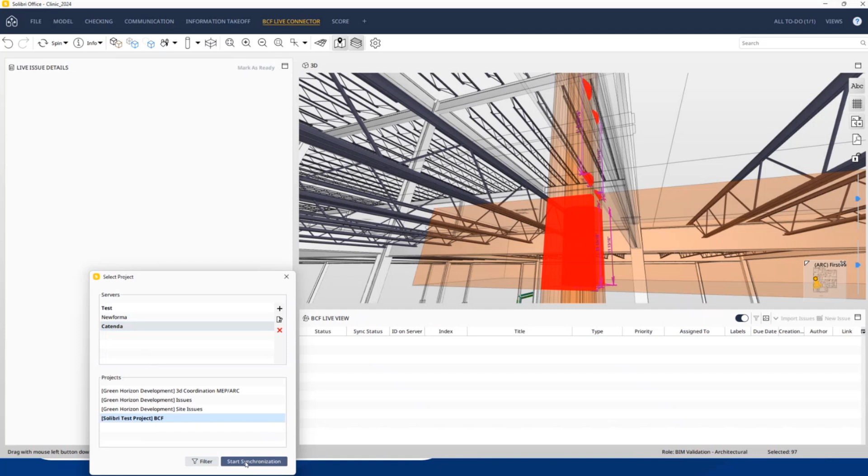I'm going to connect up specifically to Catenda. When I click Catenda, here is my project. I'm going to start a synchronization. And now you're going to see actual issues that live up on Catenda that I haven't even created in Solibri, right? So I'll let those load. And if I don't want to focus on these closed ones, I can actually filter these. I could filter them by whoever they're assigned to. If I only want ones that are assigned to me as John Lipp, I could do that. I'll just set it to be only those that are open.

And what this sync does is every 5 seconds, it's going to sync up to Catenda. And depending on when you click, whenever you do something, it'll take that 5 seconds to update. So now I'm only going to focus on the issues in Catenda that are open. This was nothing I created with you now. It's the one that lives on Catenda under their topics.

And if I jump back into Catenda now, you can see that these are issues that I created in Catenda. They call them topics. And this is the same issue here. It's just entrance, and it's really not an issue. I have it set to unknown. So you can actually see, if I jump back into Solibri, that's what this value is.

If I wanted to change this, I could go back into my issue details. And instead of saying unknown, I could say it's info, right? Mark as ready. And then you see this little spinning icon here. And then when I come back into Catenda, this should then show, instead of unknown, what I set it to, info. Oh, I have to set this mark as ready. Okay, the check mark has appeared. And then this should automatically update to info.

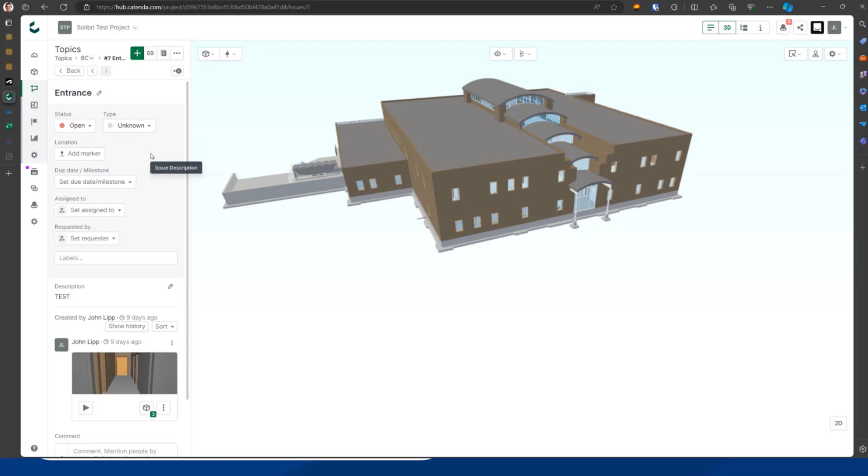I might have to click refresh. I'm not sure. Entrance. Yeah, info. So it's updated. So it's alive. Everything that syncs up is live, and whatever you change will then get pushed up into Catenda.

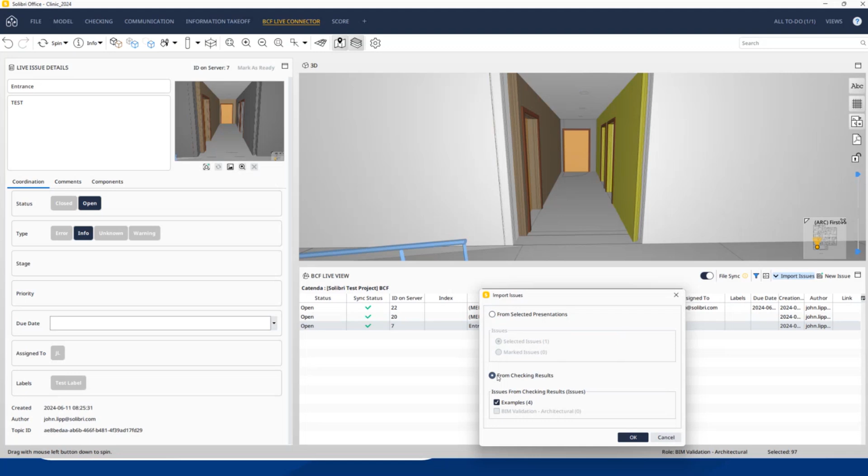What I want to do is actually push the ones that I have created with you up into Catenda. So what I'm going to do is import my issues, and I'm going to import them from my checking results. And now you can see those ones that I created during this demonstration are now included, right? My walls that don't have fire ratings. Here's that issue with my air terminal. And here again is my window, and it has those comments.

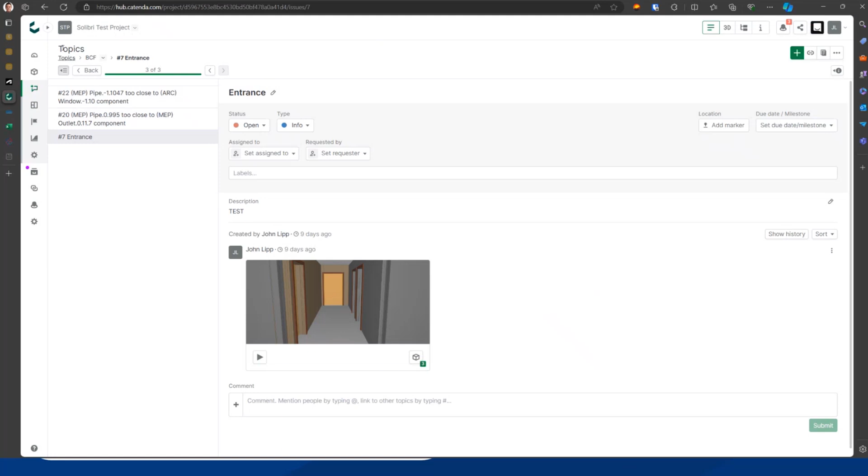And now what I can do is mark all these as ready, and my little spinny arrows will then turn into my check marks, and I can go back into my topics here in Catenda and work from those. If I come back in here, it should start opening. I'll run a refresh. Yep, they're starting to show. So again, it's going up on the web, pushing them up there. And check. So if I go back, these should start populating.

So here they come. Again, this is that air terminal that wasn't there before. And again, it's live, I can actually look at this within the model, right? Turn everything on, and it'll take me to that specific location. If I click on it, here it is. Again, if I wanted to turn on everything, I can then show all and then see here my location. This is that air terminal. Here's a more interesting one.

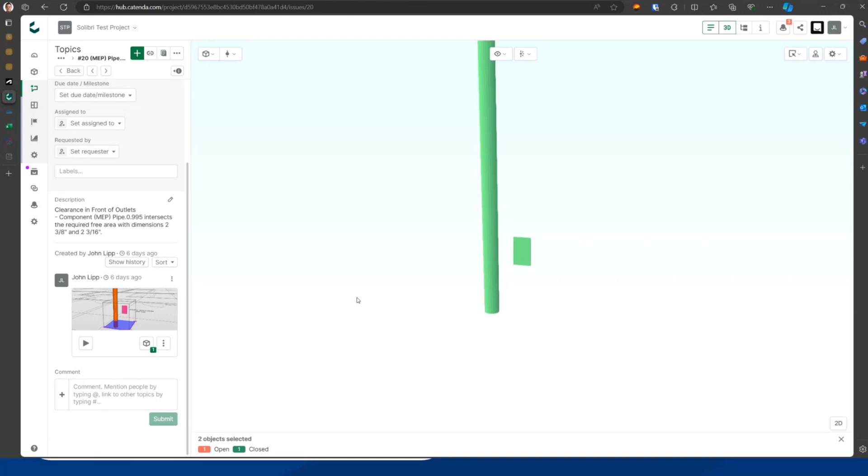Again, this is the view that I created within Solibri. But if I go to the actual issue here, I can go and then see these components. Actually, this is not the same one. Where is it? Sorry, this is the one I wanted to show you. Here's the model here. So again, this is the issue that I created in Solibri, and it gives me the information, move pipe in the wall, and I could say, all right, this is fixed.

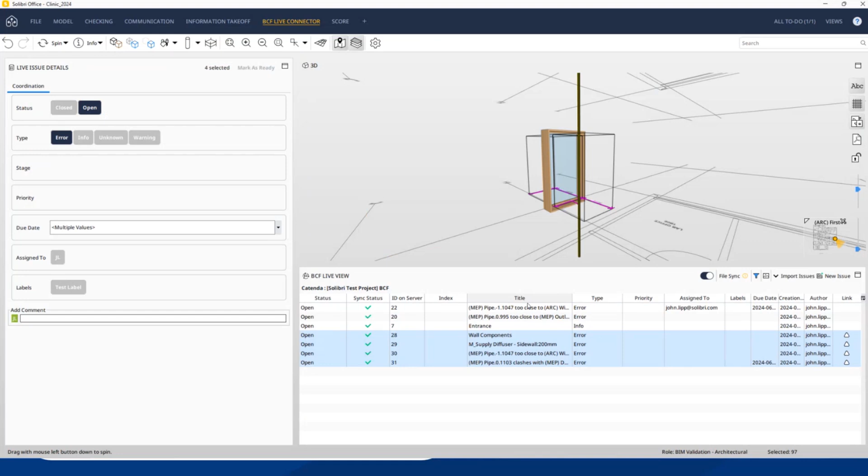I got my caps lock on. This is fixed. Submit, and then I don't have to update Solibri because it's a live sync. When I come to this, it should update with my new comment here. Under comments, it says this is fixed. So it's all in real time. So this is how you can coordinate seamlessly with your team, right? And it's all standardized. You'll have the same labels or whatever you're using in your issue management software.

I'm running out of time, but I will briefly show you ITO. Now, ITO, if I come back to my slide, essentially it allows you to report information. As I mentioned, more than just quantities, you can report any information within the model and visualize it, similar to what you have in your classifications.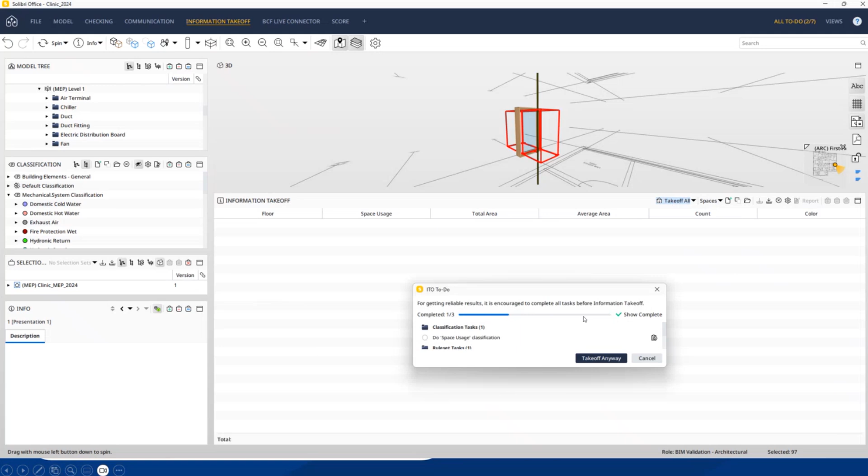What I'm going to do is load my space ITO information takeoff, and I'm going to run a takeoff all. And again, it's using this classification to sum up the total areas of these circulation spaces. It knows that by the classification I made, right? So here are all my circulation spaces, and it has a running total. I can select multiple ones if I want to see the total of my circulation and office. I select both of these, and then this value is the additional 5,000 plus the 1,400.

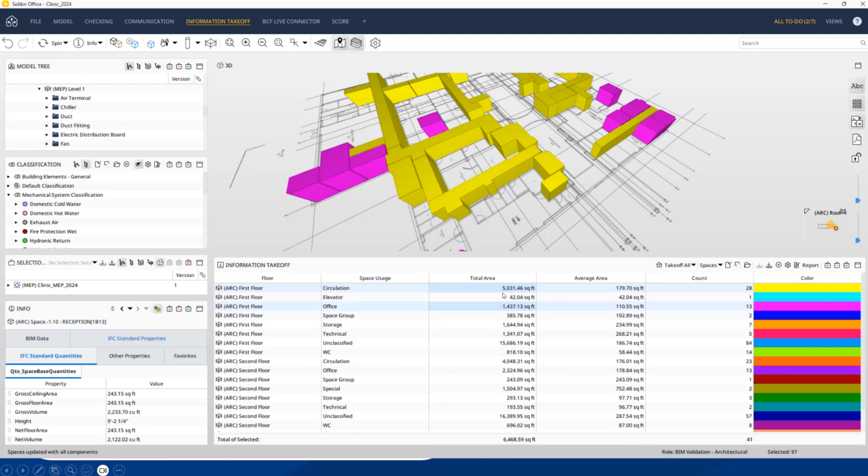If you want to see how easy it is to create one of these, even though I'm running out of time, it's so fast. I can run a takeoff all of everything, and it shows me all of my types. If I want to modify this, say my type name, it's more detailed. Here are all my columns on my first floor, right? I got 36 of this type, 30 of that type, 29 of that. And you can see it's actually color coding these by the types, right?

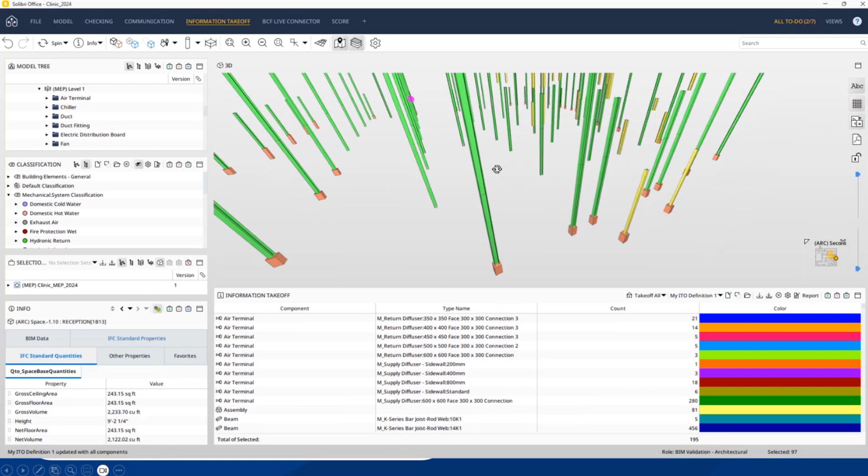This looks more like a footing. And then I can add to that. Anything you add to the leftmost column is what you're going to be sorting on, and also what it's going to be grouping on. So I take off all. Now I can see all of my first floor columns. I have 2 types on my first floor here, right? And I want quantities. I can click a new column.

I click new column. I could take the quantities that come from Revit under property set, dimension. Not sure it's going to be the right one. Let's see. Set dimension. And then let's see, I should have a length there. I think that's what it'll be within here. Let's see if we get it.

Yay. So I got my lengths here, but I can also get the dimensions or the lengths straight from the geometry within Solibri. So again, I'll do the length here. And now you can see if there's a difference. Here are my first floor columns. 31, 17. Yep, that's good. They both match. So the actual dimensions in Revit match the ones of the actual geometry, which is good. So ITO visually allows you to also validate your model, right?

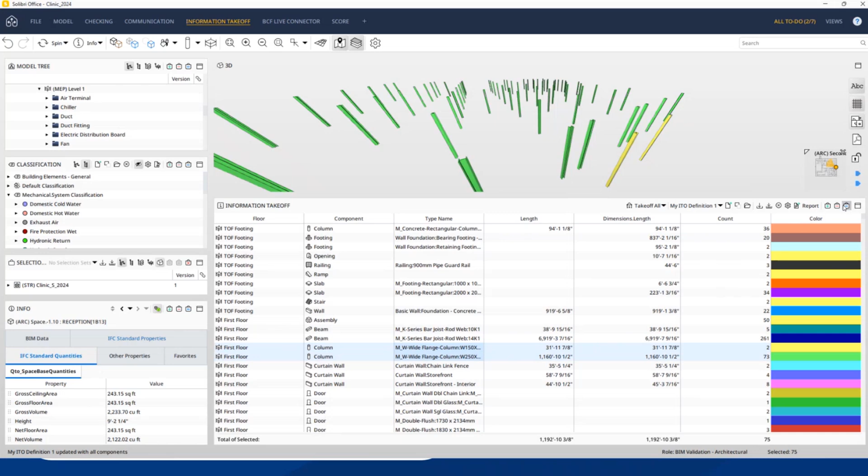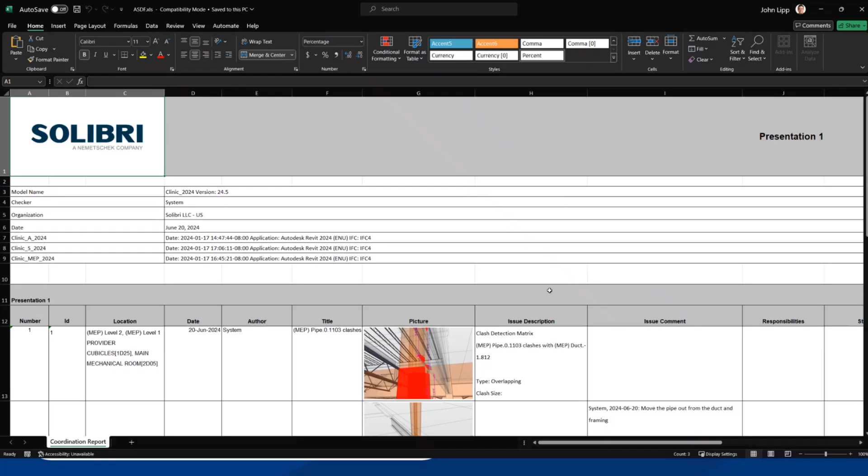And if I wanted to create a report, I can select these, isolate them into a different layout, and I could run a takeoff all, takeoff selected. Normally you want to have more items here, but I just want to show you, you can run a report here and then send this off and save this off up in the cloud if you wanted, and create a report of whatever information you want to pull out, and create schedules of these components.

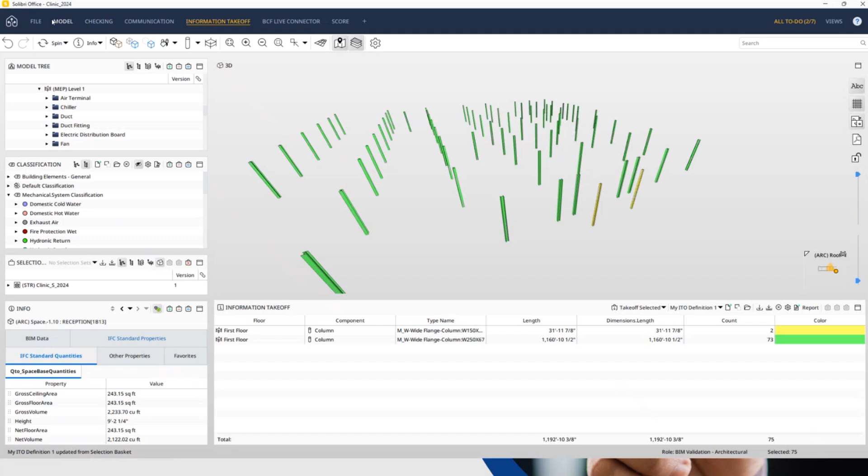John? Yeah. So out of the box, if that's kind of going over your head, if I just go back into my checks for clearances, right? It comes out of the box. If you just want to set up and pick and choose, you can take this and grab whatever you find interesting. Say, for instance, you wanted to see clearance, where was it? Deficiency detection. Where's my other model? I'll show you a simpler model. Here's my office.

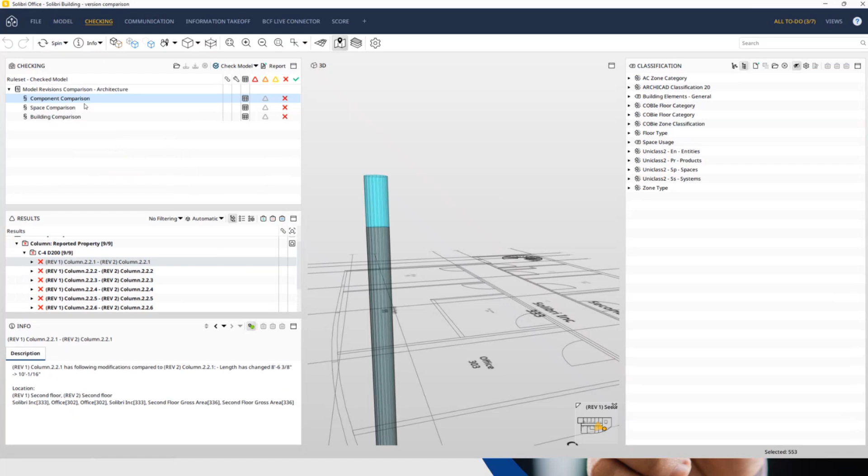If you wanted to check to see just if your columns are above it, again, you just run this check. I'll open my rule sets, and I'll pick and choose something. So you don't have to be a guru. You can say deficiency detection. I like this components above columns, and I know that there's an issue there. I can now run this check. Columns don't touch anything. Again, this is that model where it wasn't having those columns.

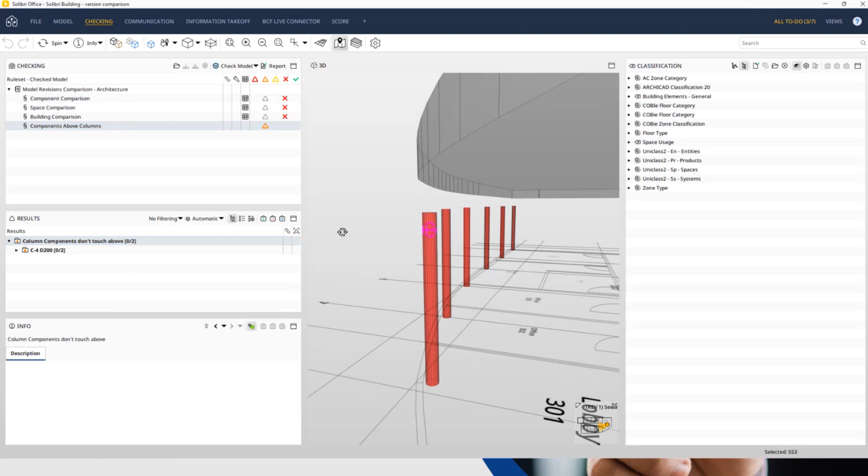So the whole beauty of this is that you have somebody learn Solibri, and you can have multiple users have licenses of Solibri to run the checks, but you create a rule set, and then all you'd have to do is click. And we have tools that automate this as well. You don't have to go through each issue and writing slides. It's probably the best way to go about it to make sure it's an actual problem. But we have a tool called Auto Run. So you can actually have Solibri run overnight, run your checks, create your reports.

And the beauty of the whole open BIM automation is that maybe you don't want to use Solibri. Maybe you don't want to go through the process of creating these. Maybe you want to just push all these issues up into the cloud. And the way you want to work is that you want to go straight into Catenda and not work with Solibri. That's fine. That's completely fine.

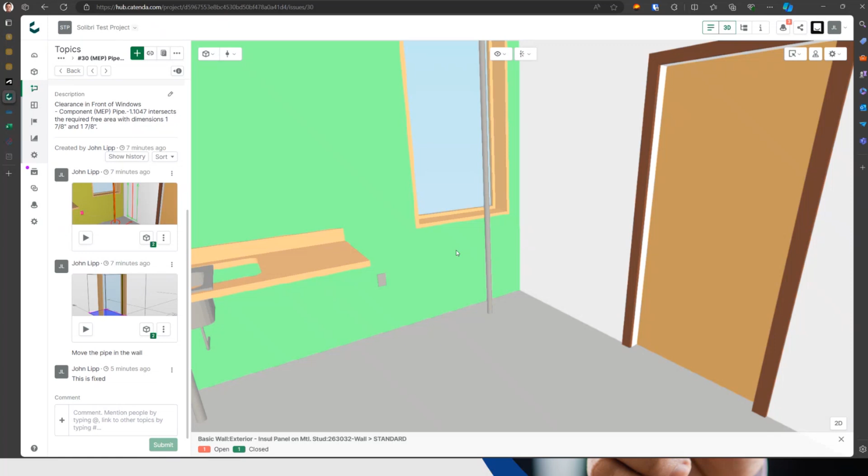You can work from here, have somebody still work in Solibri or not, and do your coordination after you find the issues straight up in Catenda or whatever CDE that you're using. Does that answer the question?

And the beauty of this clash matrix is that you don't have to go through the process of creating rules for each individual trade. If I open up BIM coordination, you can see here.

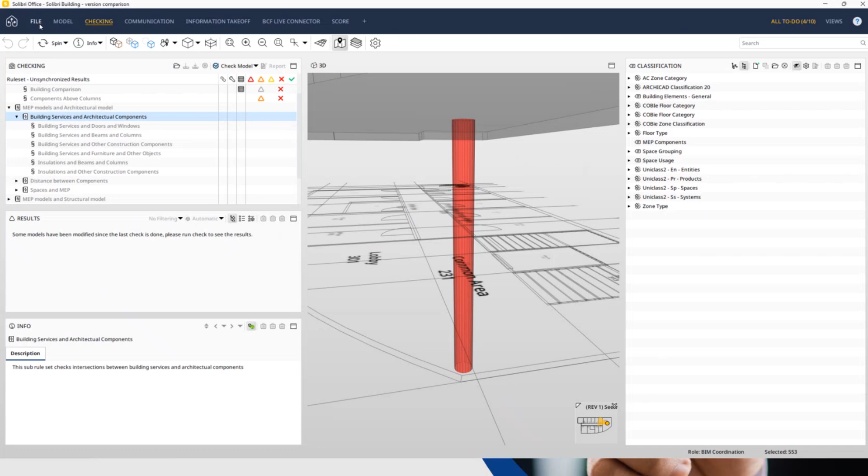I have a more complex looking rule set where it's your architectural, your doors, your beams. Might be a little overwhelming to look at. Again, if I just drag and drop from my rule set manager one of these templates, like the clash detection matrix, it's as simple as that.

You're going to use the default matrix, which uses IFC. If you're familiar with IFC, you can just use that. It'll give me my issues here, my architectural checks, and I can see things that are useful, like columns versus columns. Well, this doesn't count because I have two models, so obviously they're going to overlap, but that's the gist of it.

You don't have to be a guru of knowing all the rule sets in order to get your workflow going. And our help, I haven't shown it, but we have detailed help topics. I think I have it here. If you don't know what rule you want to use, you can type in what rule and it'll pop up.

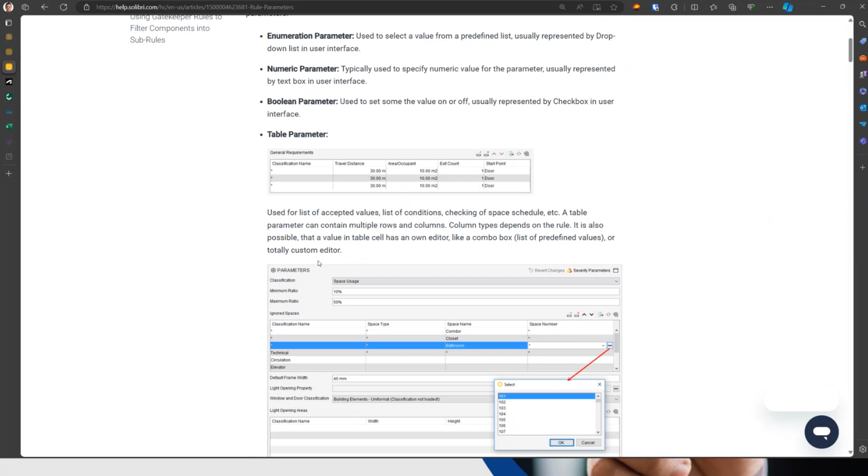Understanding rules, we have each one of these rules give you information on what the parameters are. You can see it within the help topics here, or you can actually go right into Solibri. If you want to understand what a rule does, I can click on, say for instance, free area in front. Double click on this, and it'll take me right to that rule of how you set it up.

But a lot of the out-of-the-box rules you should be able to grab and drag and drop and make use of.

I did have another question relating to, you guys get to see a large quantity of buildings pass through your server or your software. Do you have any information on what is, quote unquote, the most popular building that you have go through, like square footage wise, things along those lines?

Well, actually, we do have it on the cloud, but that's the beauty, is that this information, we're not actually collecting information of what these models are. So the only way I would know the different types of models is working with our customers, which we do. When a customer purchases Solibri, we definitely help you out and assist in creating your rule sets and whatnot. The best way to do that is to look at your models straight up and run your checks. Like if you were to run a trial, we would want you to actually open up your models, and that's how I know the different types of models.

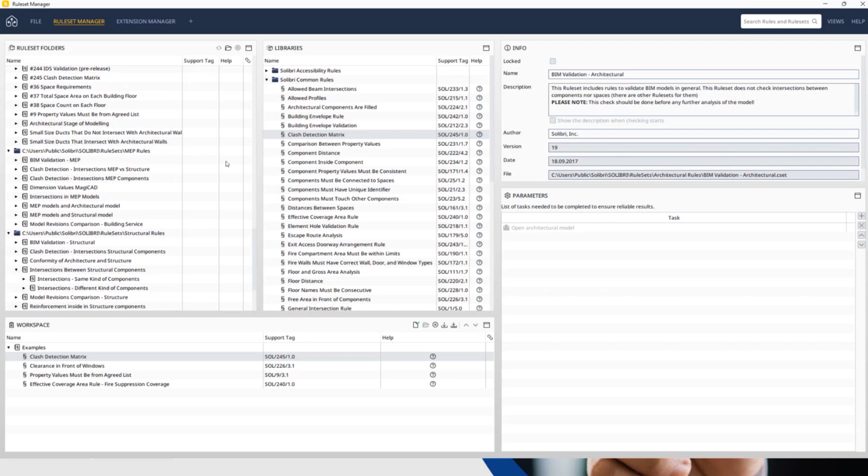And we have different use cases and different rules that can assist depending on if you're an architect or not - BIM validation architecture. We have our MEP, or even structural checks. So any discipline, and on top of this, these rules that might not be there - I didn't even mention we have our extensions that are on the Solution Center.

For instance, our ADA accessibility checks live here. COBie, Construction Operations Building Information Exchange, basically facilities management, lives right here. We have different standards, I think there's a Swedish area calculation. So a whole variety of different use cases, a whole variety of different stakeholders can use the product.